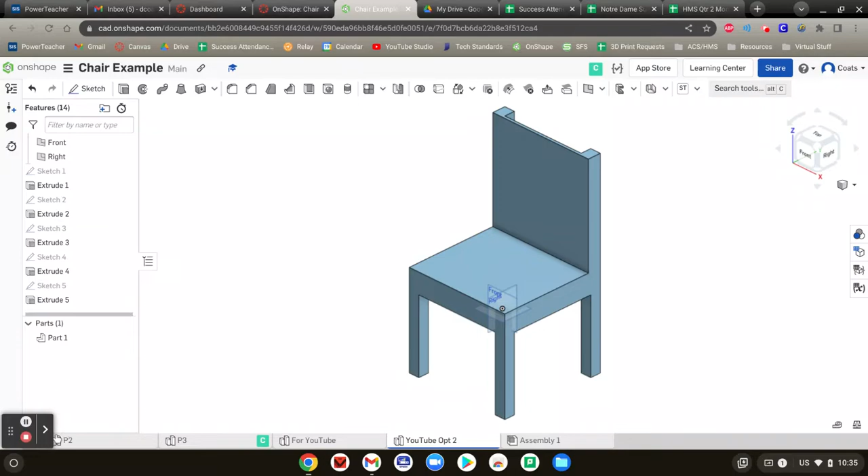I'm going to do it that way. Let me get that out of the way on my screen so I can import the image. So hit my plus sign, hit the word import. It's going to be the most recent thing I just saved to this Chromebook. So once it does its thing, Nike logo right there, okay?

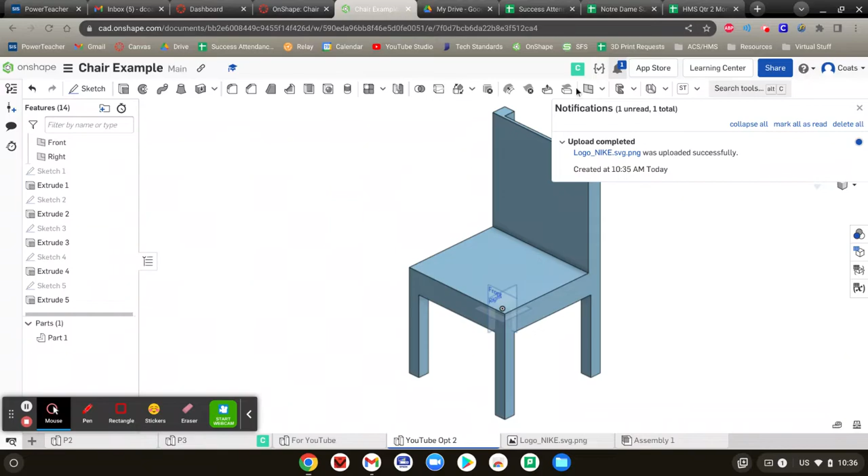So now it's imported into OnShape. You can see it's down there. I'm going to move that thing back out over here so it's not in my way. Good, okay, now I'm going to close that out of the way.

I am going to start a sketch on the backrest. Go to the front view. I'm going to insert an image, the Nike logo — I just chose a Nike logo to keep it kind of easy for this video's sake. Okay, I'm going to put that right here. That looks like a decent enough spot for that.

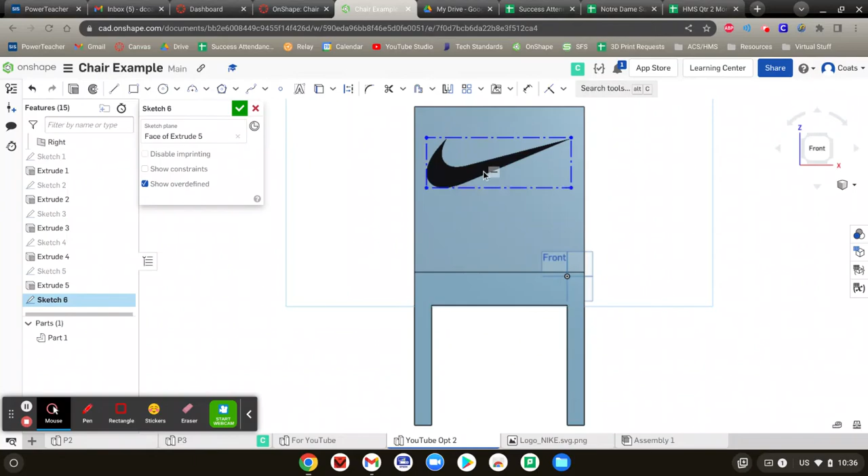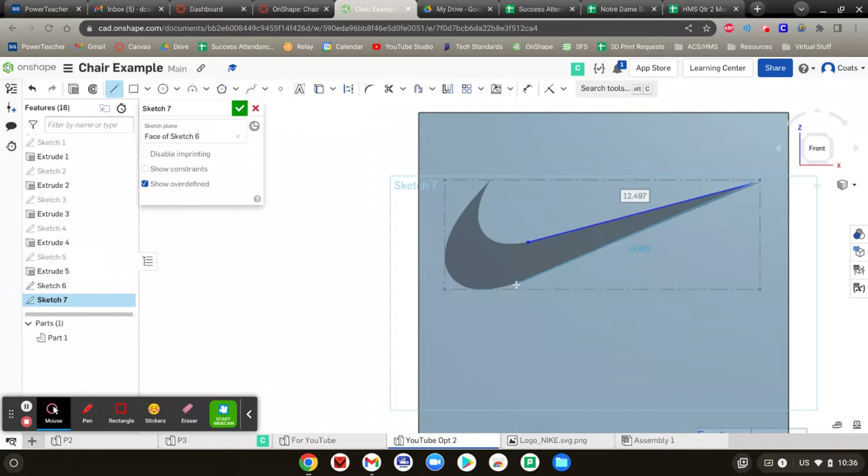I'm going to zoom in so I can trace it real fast for you. So I'm going to finish that sketch, then go to a new sketch on top of it. I'm going to draw a straight line from this point right here all the way up to that, and a straight line that goes all the way down to right there. Hit the escape tool to turn that off.

Now we're going to go to the spline tool, and I'm going to trace around the outside of this. I'm going to be doing this kind of quick just for the sake of the video, so I don't want it to be exactly perfect — I don't want it to look horrible, but just good enough to keep the video short for you. And I got that right there. Obviously you can do a lot more complicated shapes, but there's that.

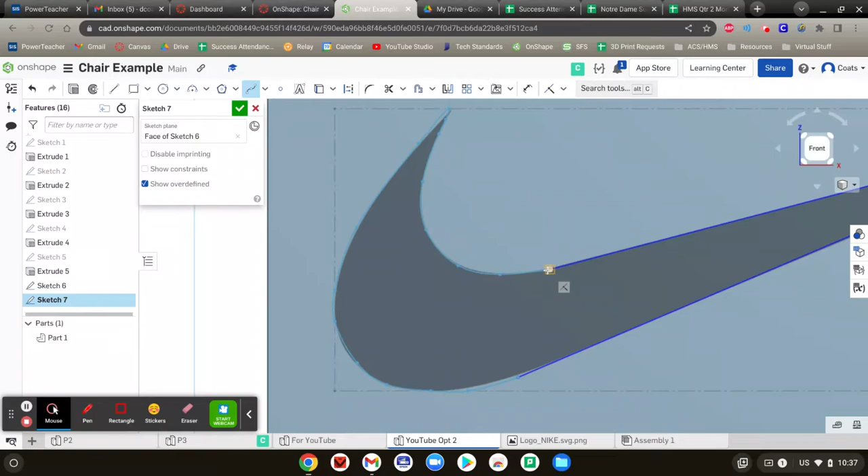And now I've got my shape there, so I hit escape. Now I have that Nike logo there. I'm going to hit the check mark. I'm going to hide this sketch right here, the one I traced, so now I only have the one I made.

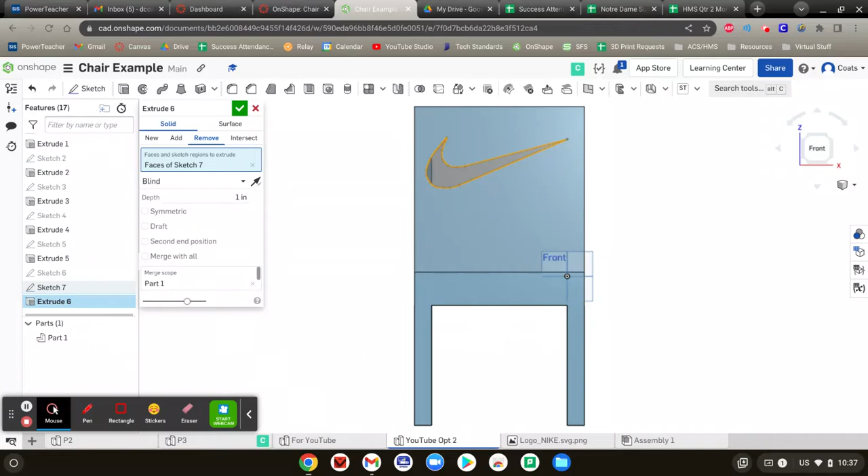I'm going to hit extrude. What do I want to extrude? That thing I just made on sketch 7, but I'm just going to remove stuff. And it was actually only a half inch extrude on the backrest. So if I do a full inch, it goes the whole way through. The only reason it doesn't go the whole way through over here is because I didn't place it far enough to the side — it went into the armrest right here, which is fine with me for right now.

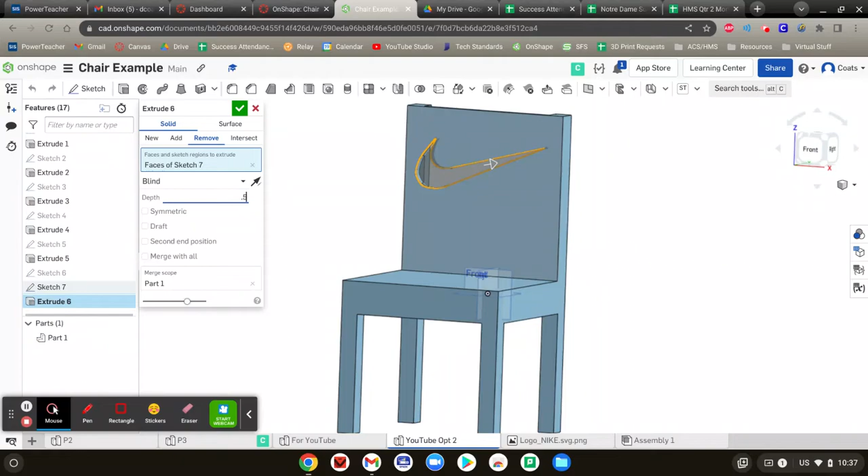How could I fix that? I could just say 0.5, and then it wouldn't cut anything out of the armrest, but it also wouldn't go completely through. So if I go 0.5 right there, it doesn't take anything out of the armrest on the back. And that gets you a couple extra credit points just by doing a logo cutout on there.

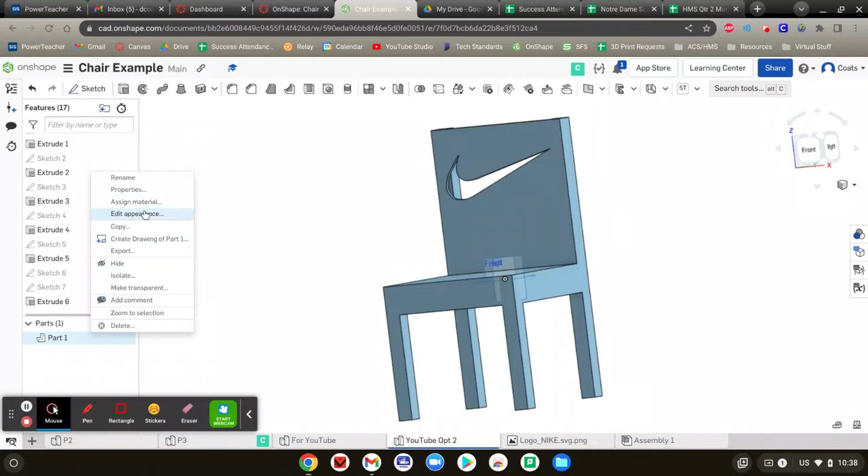And here's an even easier form of extra credit I'll show you guys. So remember how to change colors. I'm just going to make my whole part 1, say edit appearance. Let's just make it blue because I like blue — it's kind of a bluish purple, but no, that blue.

There we go, I don't like that one either. Now I'm being picky — that blue will work. So then I hit the check mark.

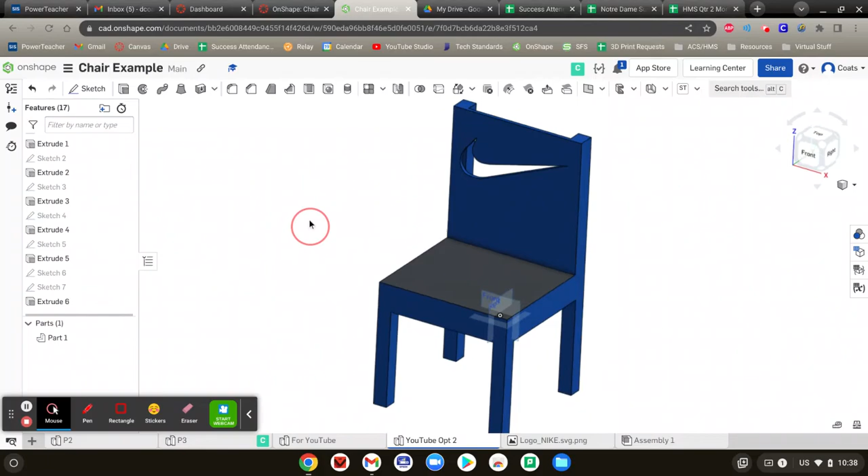What if I want to make the seat black? I can right click on that, say edit appearance to it, make this really dark gray down here, so it's basically black. And there's a couple extra credit points because you made it at least 2 colors.

So this video showed you how to insert the image, trace it, cut it, and then give it 2 colors. That gets your extra credit points for this assignment as well.